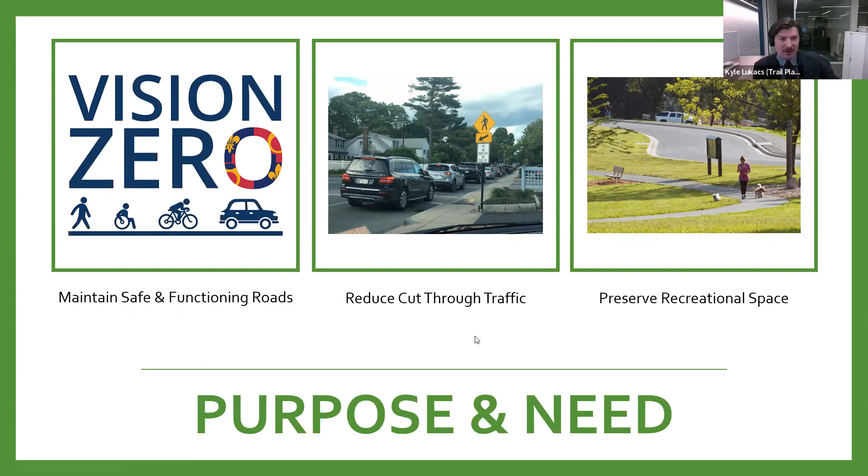Additionally, an added benefit of this is having essentially the Open Parkway space available 24/7 instead of just on Saturday and Sunday. So this slide here shows a cross-section of the pre-pilot conditions between Arlington Road and River Road.

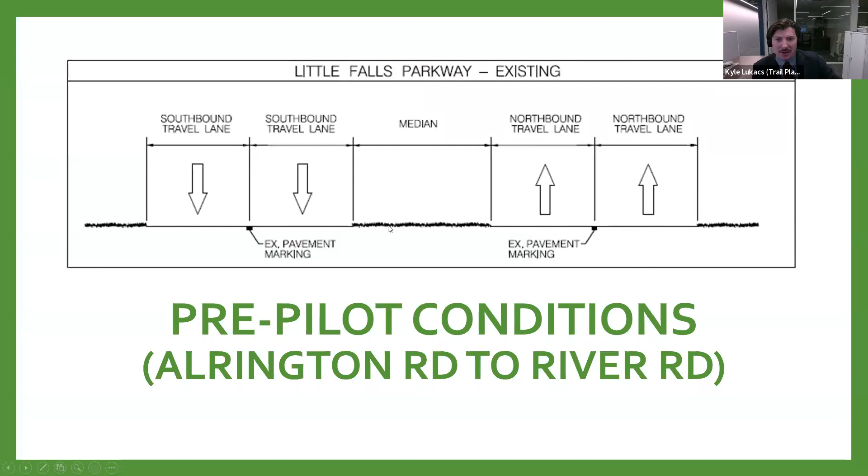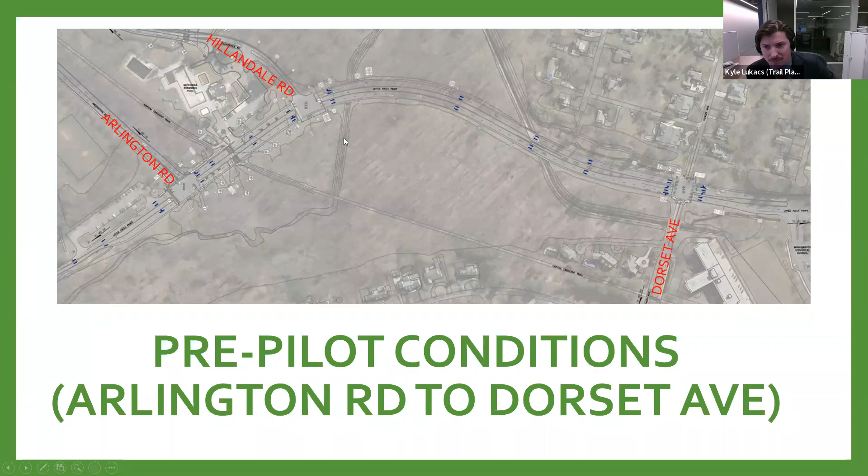Thanks, Kyle. Good evening, everyone. Thanks for joining us. Montgomery County is the first suburban county in the U.S. to adopt a Vision Zero action plan to reduce traffic fatalities and severe injuries.

Parks coordinates with DOT and SHA on trail safety and traffic calming projects throughout the county. It's an ongoing CIP program. Next slide, please, Kyle.

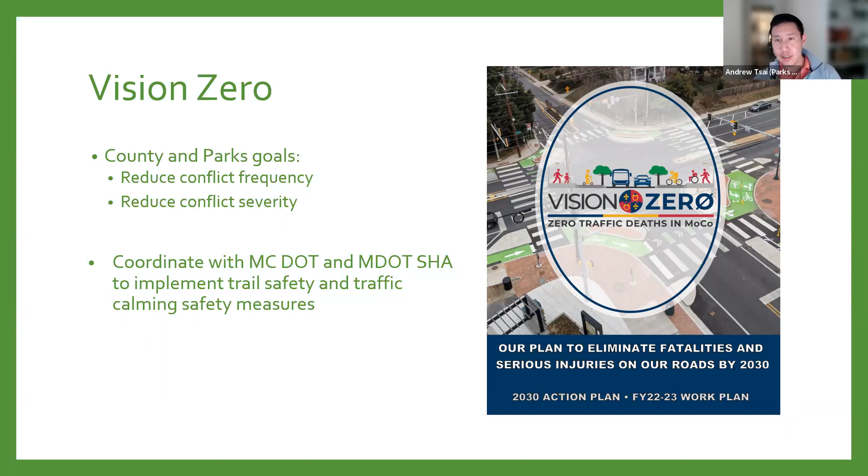As mentioned earlier, reducing vehicle speeds is the most effective way of reducing conflict frequency and severity. The graphic here on the right highlights that at a 20 mile per hour impact with a pedestrian, the pedestrian has a 95% chance of survival. That drops to 55% at 30 miles an hour, and at 40 miles an hour, not looking great for the pedestrian. Survival rate has dropped to 15%.

The driver's cone of vision as well as reaction time also increases at slower speeds. So at 20 and 15 miles an hour, it allows a driver the greatest reaction time and time to respond to shifting conditions in the roadway. Next slide, please.

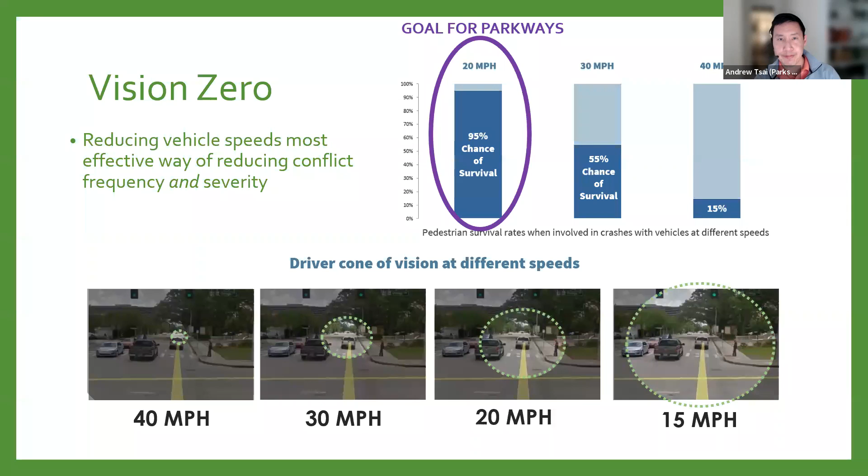These 2 pictures highlight the Capitol Crescent Trail crossing and Little Falls Parkway, which is in between Arlington Road and Hillandale Road. In 2017, Parks implemented Vision Zero based safety improvements at the crossing. And to point out what those improvements are, you can see the flexible posts that were used to shut down 1 lane in each direction.

As well as the installation of a raised crosswalk, which is sort of like a speed hump, a vertical deflection that forces cars to slow down as they approach the crossing. We also installed additional signage and other associated improvements.

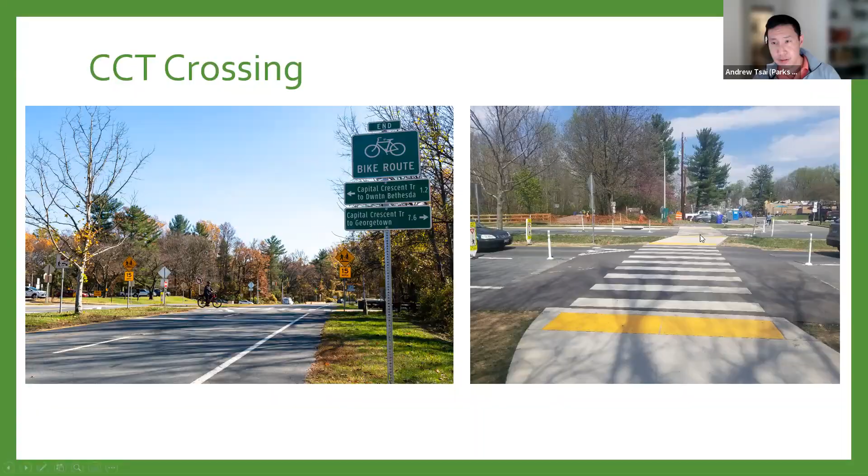It's also worth noting, as we're talking about the Capitol Crescent Trail crossing, that we do have plans to kick off a Capitol Crescent Trail facility plan looking at upgrades along the Capitol Crescent Trail. So this will involve its own separate outreach, as well as an existing conditions analysis, trail planning, trail design, and looking at amenities and trail connectivity as well. So we do have a process for Capitol Crescent Trail specific things moving forward.

Here's a timeline for Little Falls Parkway itself. So we launched this in April 2020 in response to the COVID-19 pandemic and kept this in place until December 2020, when we suspended it for the winter months, in part due to operational challenges. When we suspended it, we received a lot of pushback asking for us to reinstate the open parkways, which I'll touch on in a second.

But we reinstated it in March 2021 with a slightly smaller section. So originally it went from Massachusetts Avenue all the way up to Arlington Road, and we dropped the Massachusetts Ave to River Road section when we reinstated it.

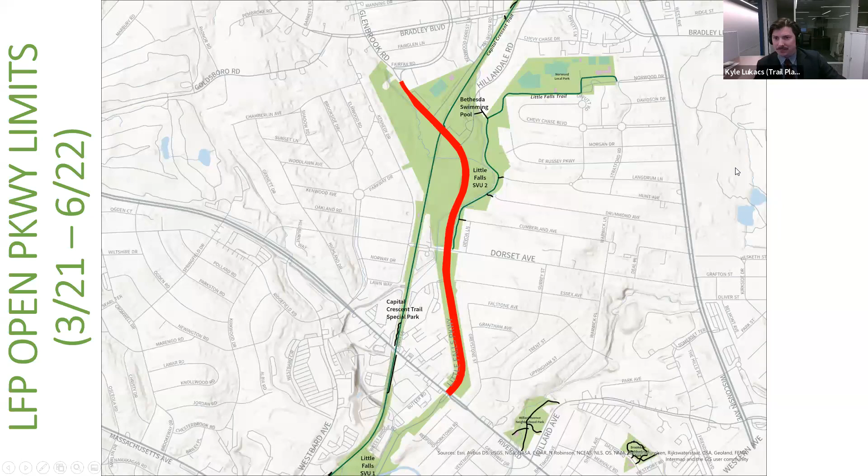One of the things we've done throughout the Open Parkways program is monitor the use. We have trail counters set up at several locations, two on each of the open parkways. We had one originally at Massachusetts Ave until that portion was dropped from the program, but we've had one at the Bethesda Pool location, two on Sligo Creek, and two on Beach Drive. Using these trail counters, we've counted over 300,000 users between April 2020 and June 2022, which works out to about 3,000 users per weekend.

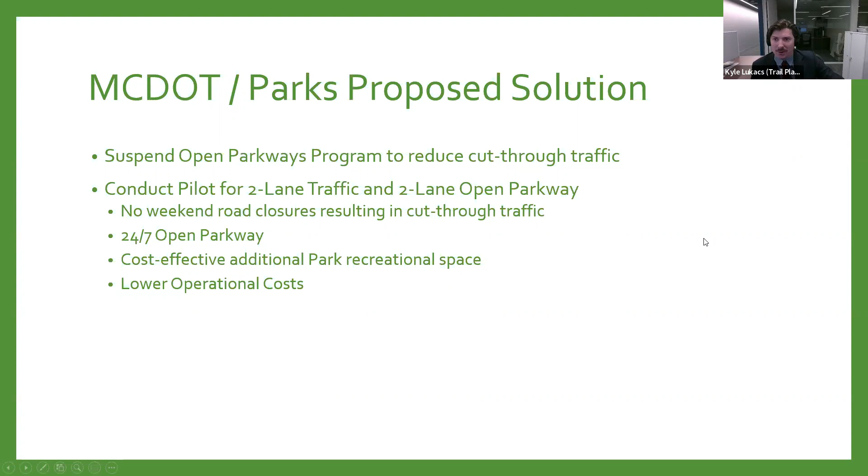Another thing to talk about: Little Falls Parkway between Mass Ave and River Road is 2 lanes. The entirety of Beach Drive as well as Sligo Creek Parkway are also 2-lane roads. So part of this is helping to create some consistency in the parkway experience across our parkways, and converting this from 4 lanes to 2 lanes helps create that consistency.

This slide highlights some of the public input and process that we've gone through to this point. I'm going to quickly cover this.

We suspended the Open Parkway program in winter of 2020. We heard strong opposition to suspending that program, with over 1,900 signatures on a petition, but we still heard concerns about neighborhood cut-through traffic. So we began our traffic data monitoring and collection, really looking at the impact on neighborhood streets. When the Open Parkways program was suspended in June and our pilot program was initiated, this was again due to the public input on the neighborhood cut-through traffic.

We've conducted several rounds of traffic counts and monitored the impacts of phase 1 and phase 2. We've also made adjustments to phase 1 and phase 2 based on the public feedback we've heard, down to the placement of a single flex post, as well as adding additional flex posts in some locations.

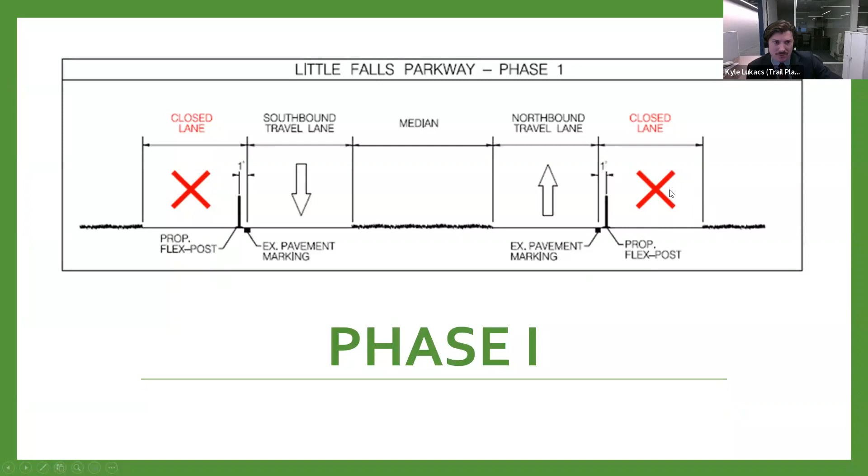So on each side of the roadway, we've dropped the outside lane and maintained the inner lane. Phase 2, we shifted all the traffic to the east side. So now the east side is two-way traffic with one lane in each direction, and the west side is open for bicycles and pedestrians and others to use 24/7. This was implemented in October 2020.

Here's again some cross sections. Where we have the grass median, we're removing the vehicle lanes, and we've got the southbound and northbound travel lane. At some of the intersections, or where we don't have the barrier, we've added some water-filled barriers to provide a little additional protection there.

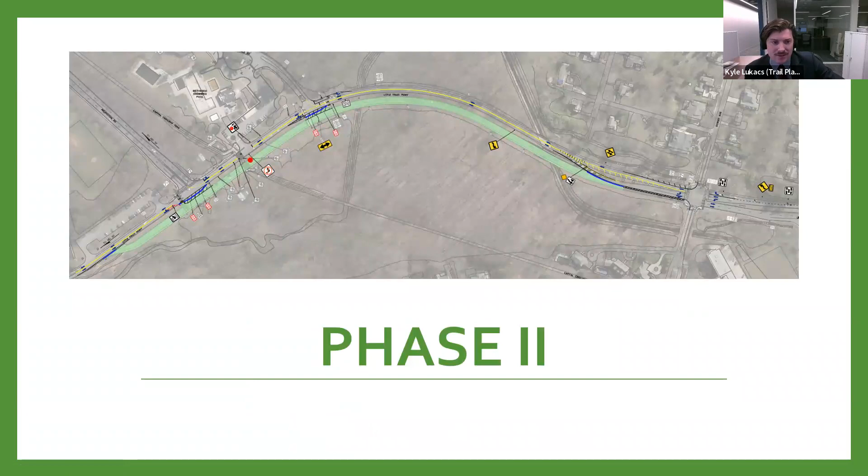Here's an aerial overview of phase 2, and I'll highlight a few things we've done with the design here. This in blue is our water-filled barriers, added to provide some protection for those walking and biking. We've moved the stop sign up to basically the edge of the roadway instead of where it originally was. We've also added some pavement in areas - this allowed us to add a right turn lane, to provide some additional space for those turning right onto Hillandale.

Where the two lanes diverge here, this is another example of where we've listened to public feedback. Originally this was installed without flex posts, and we heard some concerns, so we went out almost immediately and installed some flex posts here to make sure this roadway is as clear as possible and functions and works as best as it can. So we're really listening to the feedback we're receiving on the traffic configurations and making changes to ensure that it's working.

Now I'm going to pass it over to Andrew to talk about vehicular traffic counts. Thanks, Kyle. This presentation will be posted on the project website after this meeting so that everyone has an opportunity to go over this data on their own time as well.

It's a decent amount of information, and I'll be giving a summary of it.

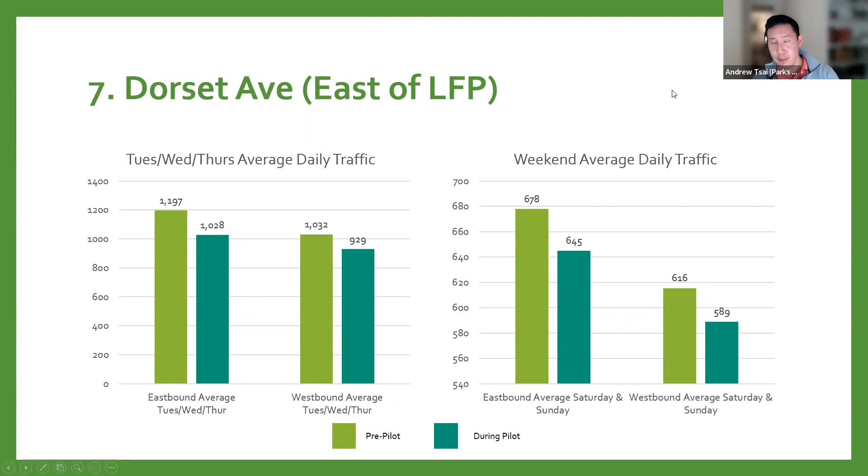Similar situation on the east side of Little Falls Parkway, where we also saw a decrease in traffic volumes.

Brookside Drive is also in the Kenwood community, and it saw a decrease in both weekday and a substantial decrease in weekend cut-through volumes.

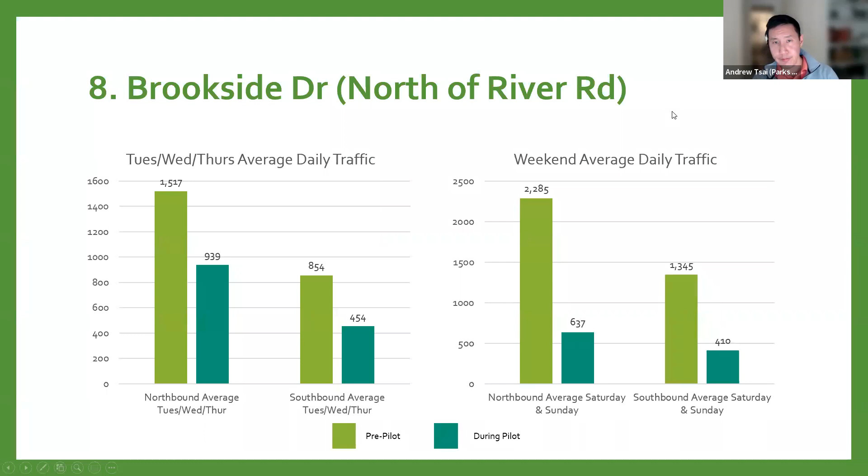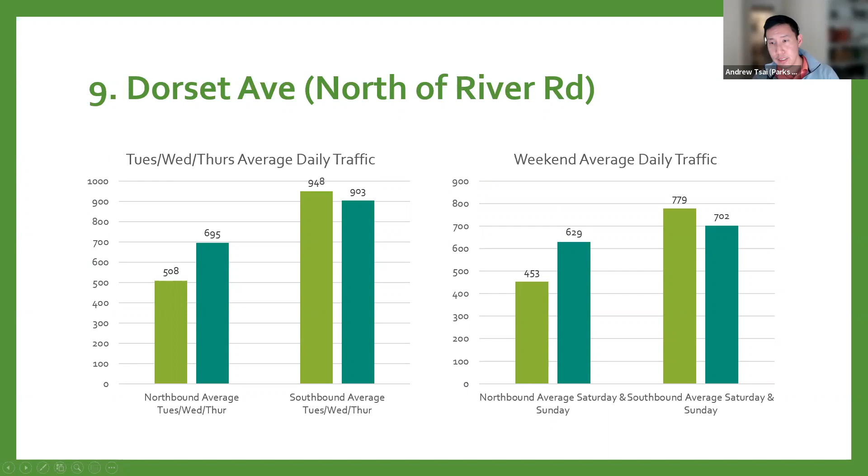Finally, Dorset Avenue closer to Maryland 190 River Road saw a slight decrease in southbound traffic, an increase in northbound weekday traffic, as well as weekend traffic, with a slight decrease in southbound traffic.

We also performed intersection turning movement counts at the 3 intersections along Little Falls Parkway - Arlington Road, Hillandale Road, and Dorset Avenue - to compare to counts we already had from 2018 and 2019. The takeaway was that the intersections are functional and operating within expected conditions.

We identified from these counts the peak hours along Little Falls Parkway, which were 7:45 to 8:45 in the morning, 4:45 to 5:45 in the afternoon. We also found that peak hour volumes have decreased in all directions from 2018 to now 2022, from peaks of 440 vehicles per hour in the morning northbound, 640 southbound, down to 350 and 580 respectively, and from 500 and 690 down to 450 and 560 in the afternoon.

We also conducted travel time runs. This wasn't conducted with computer modeling - it was done the old-fashioned way, a traffic engineer with a stopwatch in a car. So anyone can replicate this.

We did these travel time runs during the peak hours just described, from Fairfax Road all the way down to River Road. It consisted of driving up and down in both directions 5 times to get an average travel time, then using the average travel time with total distance traveled to determine average travel speed, which ranges from 16 to 18 miles per hour in the northbound and southbound directions. From the average travel speed, we used standard traffic guidance to assign an arterial level of service, like a report card from A to F. The grades assigned based on the highway capacity manual were 3 Bs and 1 C.

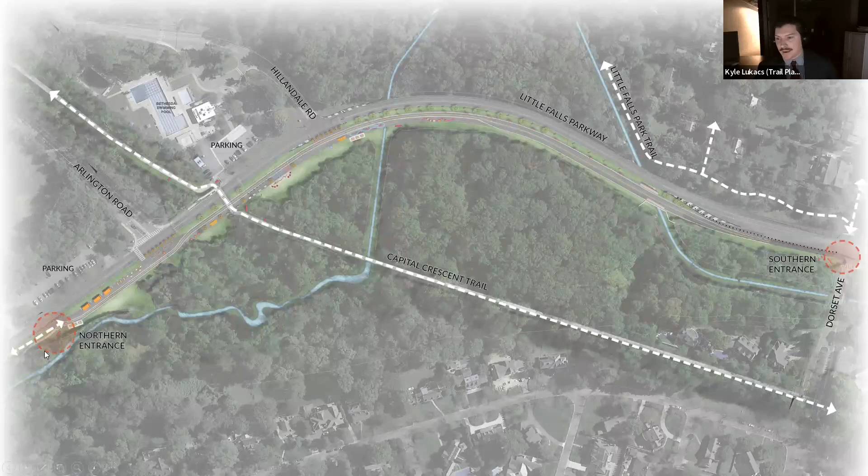Here's an end-to-end overview showing the full limits of the pilot park. And zooming in a little bit here, moving left to right, we're showing a few examples of the types of amenities that we envision could be activated for this pilot project, or pilot park.

We've got some room for food trucks as well as some seating. We've got some games such as cornhole, some space for mazes or chess and checkers, some ping pong tables, a variety of seating, some nature play areas, and some skate park features.

One of the other big things that I think would work really well here is this little area showing a traffic skills garden, an area where you can learn to ride your bike.

We've heard from a lot of people that the Capital Crescent Trail is already here, so why would you need additional recreational space? If anybody's been out on the Capital Crescent Trail, especially on weekends, you'd know it's extremely busy and some cyclists are moving pretty fast. So for me personally, I wouldn't take my daughter out there to teach her how to ride a bike on the Capital Crescent Trail.

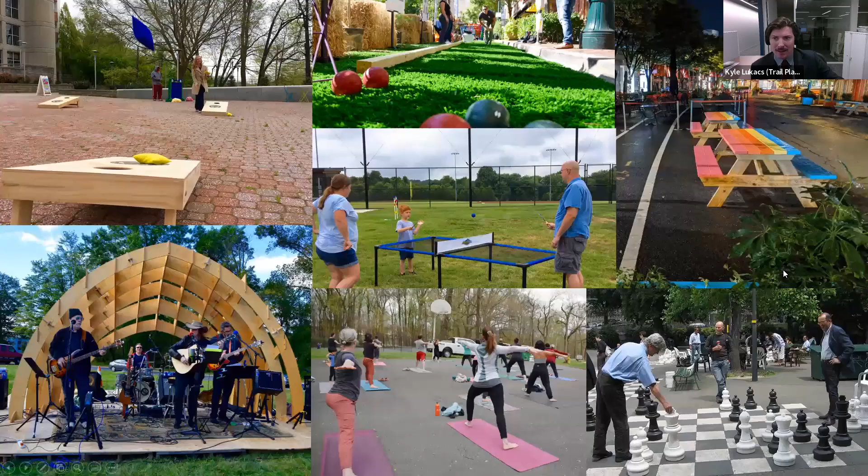But if I had some additional open space, recreational space, that might be better suited for doing things like that. Here are a few pictures from throughout the county of some previous parks activation projects we've done, things like music, cornhole, ping pong, bocce, and things like that.

Moving forward, if we are to implement this pilot park, we can make some additional safety improvements, such as fencing in the median or pavement removal at the intersection.

Another question we've heard a few times is where are people going to park to visit this? The first thing worth noting is the Capitol Crescent Trail is an extremely busy trail, a major connector for the communities in this area, so we think a lot of people will be able to walk and bike to this pilot park.

But we also have parking at the Bethesda pool, as well as just north of there, so we have some existing parking already in place. And if this becomes more than a pilot, that's something we can look at.

As far as the process, we are presenting the results of the traffic study right now. We will be going to the planning board to get their approval to maintain the current configuration. If that approval is received, we will work to activate the pilot park. Once that's activated, we'll go back to the public and initiate a process for looking at what a permanent park in that space might look like before moving on into design.

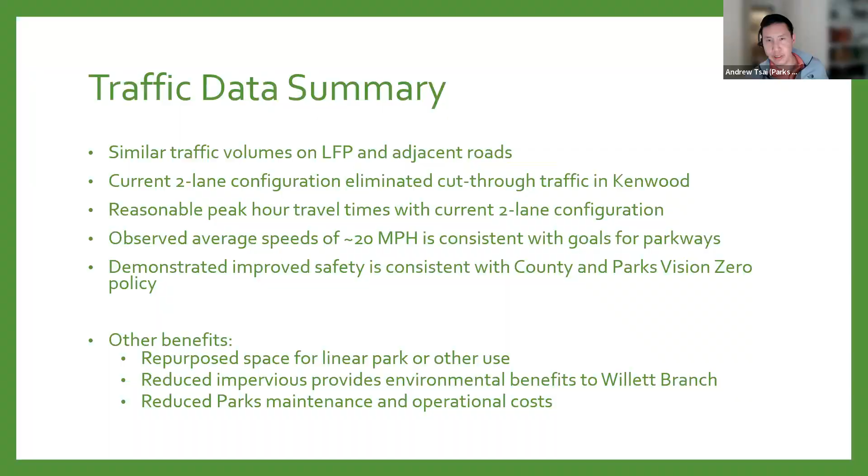Have you done any traffic counts on Kenwood and also on Goldsboro Road, which are 2 alternatives that drivers take? We have conducted counts in the Kenwood community, not on Goldsboro Road, but along 2 roads in the Kenwood residential community: Brookside as well as Kennedy. Brookside is closer to River Road and Kennedy is a little closer to Bradley Boulevard. In 2017, we also conducted some cut-through studies with vehicle cameras in the Kenwood area, but nothing specifically on Goldsboro Road. The counts for the 2 locations in the Kenwood community did show a decrease in both weekday traffic as well as a substantial decrease in weekend traffic.

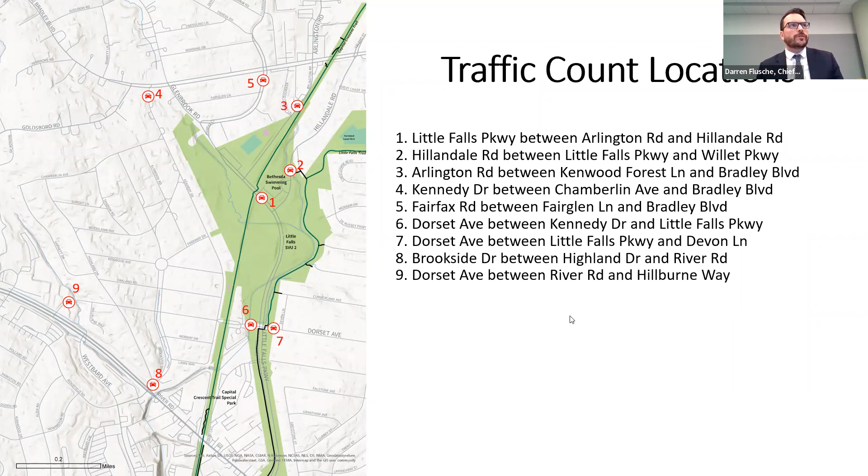Hi, thanks. I have to congratulate you on this excellent analysis and very thorough job. I'm a retired firefighter.

I was assigned to the Glen Echo Station the last 8 years of my career, serving rescues on the Capitol Crescent Trail and Little Falls Parkway and River and Mass. The over-design of Little Falls Parkway has always puzzled me, and it is a real safety hazard. So going to 2 lanes, I see as a great benefit here. You've shown me that the impacts to surrounding communities are limited or extremely limited. So I believe it's a win-win.

I'd like to see more forestation of the Little Falls Parkway corridor as a result of this work. That would be great. And the crossing of Little Falls, the Capitol Crescent Trail, Little Falls Parkway, just really needs to be kept at grade. I have attended to head trauma crashes where bicyclists have lost control going down the steep ramp on the bridge over River Road. This bridge, which causes a change in elevation for cyclists and walkers, is really a poor infrastructure solution. Thank you, Richard.

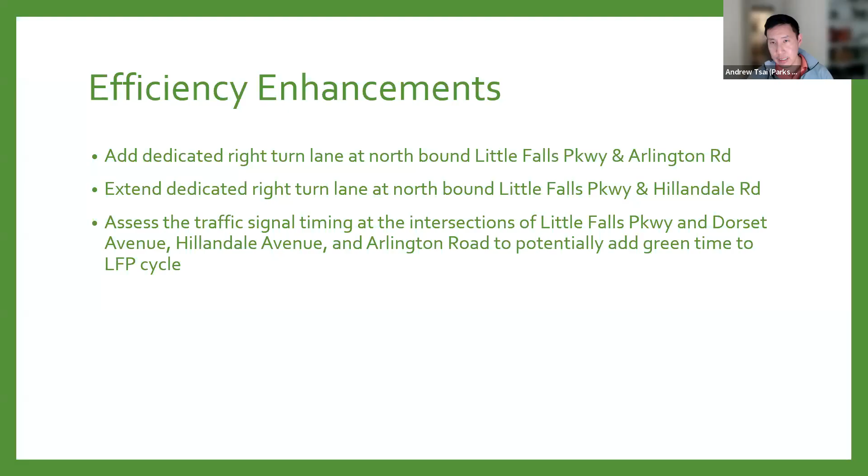Thanks, Andrew. You want to start with that and kick it to Brian? Yeah, sure, a lot of great points there. The counts we have along Little Falls Parkway, River Road, and Wisconsin have been done for years—Wisconsin and River since almost the turn of the century. We're seeing a long-term decrease in traffic pre-pandemic as well. So if federal workers go back to the office, we're not expecting that to result in a drastic change in the volumes. I'd like to invite Brian to speak about future modeling, future growth, potential implementation. That's certainly something we can do as well.

Thanks, Andrew. So let's leave this slide up. When we originally did the traffic model, we actually used 2016 traffic counts to be conservative, not expecting the continued decrease we're seeing. So we're pretty confident that future growth has been taken into account. As Andrew was saying, if this pilot program continues or gets accepted by the planning board, we'll be adding a right turn lane onto Arlington heading into downtown Bethesda, which would add capacity to the overall network.

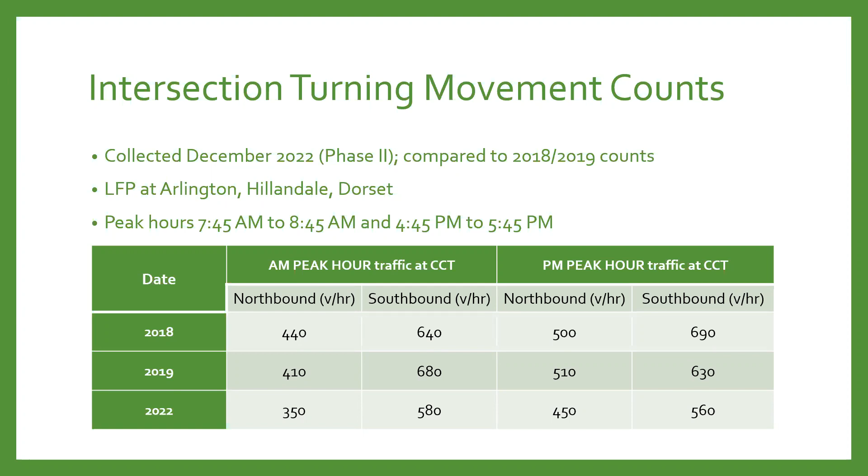And you were doing just fine until you eliminated the entire western part of the lanes at the pool going all the way down to Dorset Avenue. That's a development no one asked for, no one needed. All the data you're citing has nothing to do with that period of time since November. Moreover, driving on it, I've actually had to take emergency action to avoid a head-on collision from people who mistakenly go in the wrong lane on those two lanes.

What you've done in addition is cite the High Line as a model for what you're trying to do. The High Line in New York City, as you probably know, is an elevated freight line transformed into a public park, maintained by the Friends of the High Line, a nonprofit community organization. I really think the Parks Department should save the money, go back to the configuration that allowed people to pass down both sides with two lanes of traffic. You've done a good job with the safety crossing at the pool, we cross it every single day. And you need to remember, if it ain't broke, don't fix it.

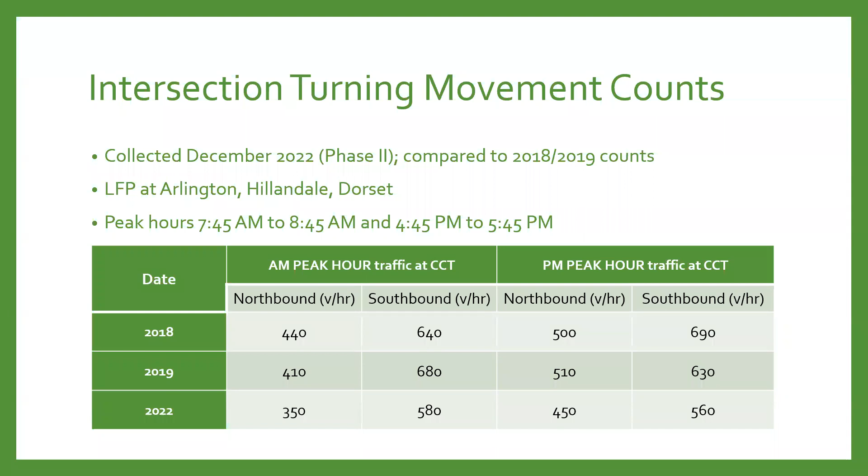Thank you for the comment. I think generally that comment speaks for itself, but there was a comment about when we did the counts, and I want to give Andrew and Brian a chance to address that piece.

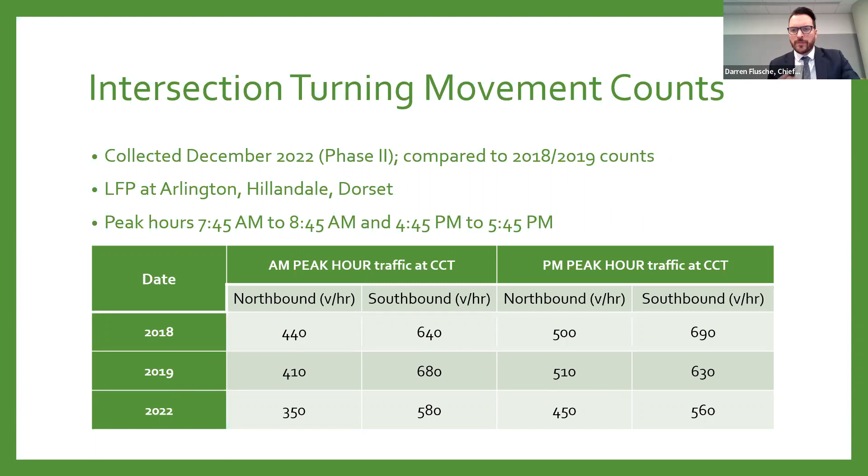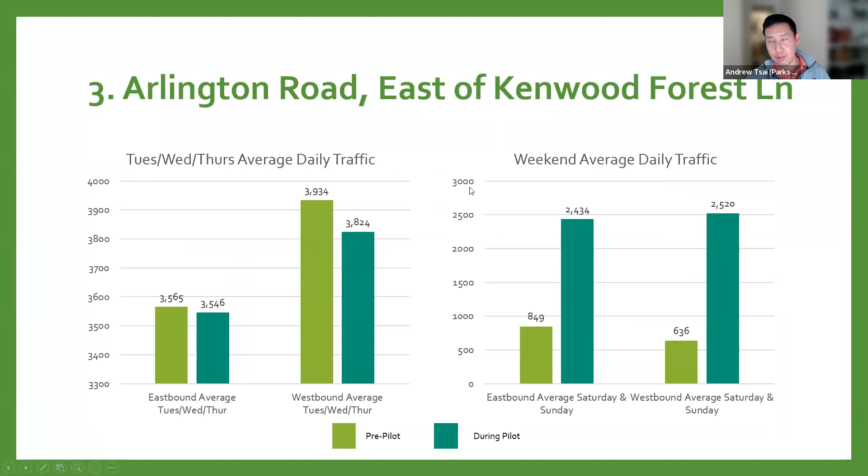I'll just add a comment on the bicycle and pedestrian count. We have trail counters out there that we've used to collect counts for bicyclists and pedestrians on the open parkways. We've also got trail counters on the Capitol Crescent Trail in a few different locations, and when you stack the data from the Capitol Crescent along with the open parkways data, it tends to peak and decline on the exact same day. So we're pretty confident in the data we've collected counting bicyclists and pedestrians.

I've seen that in the Q&A box a little bit, so I just wanted to provide some context to the bicycle and pedestrian data there.

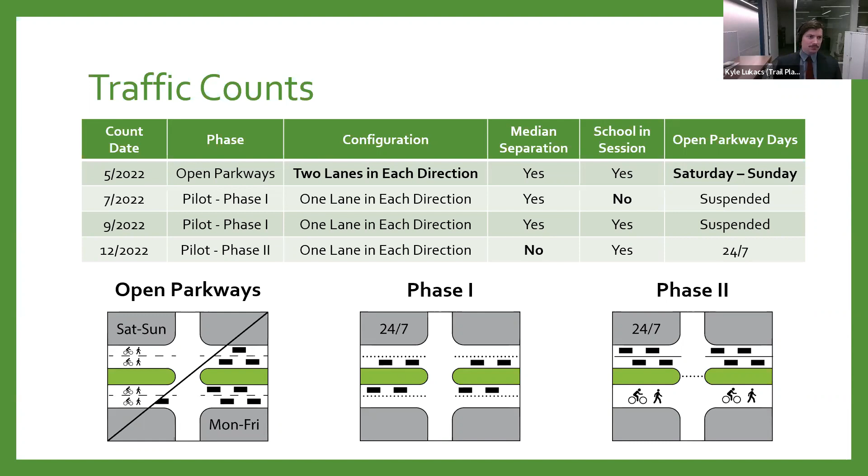Okay, I want to make sure I'm also introducing questions from the Q&A box. One was, if speed and safety is really the primary concern, why aren't there cameras or other speed enforcement measures? I think Lieutenant McAleskis touched on that a little bit, and I'll just state that as Kyle mentioned in the presentation, we have a holistic set of concerns, including safety, safe operation of the road, public recreation, and reducing traffic. So, Lieutenant McAleskis, I don't know if you want to say anything about other speed control methods.

Sure. For speed control, we do enforcement down there for speed. As far as cameras go, that would take coordination with Montgomery County government, and I'd have to look into it further to see what the parameters are that would make that area qualify for speed cameras with the county's program as it exists today. But right now, we can also deploy variable message signboards down there that can flash the speeds of cars to remind drivers of the speed limit. That does help — we've used it on Beach Drive and Sligo Creek Parkway, and it does help control the speed of drivers.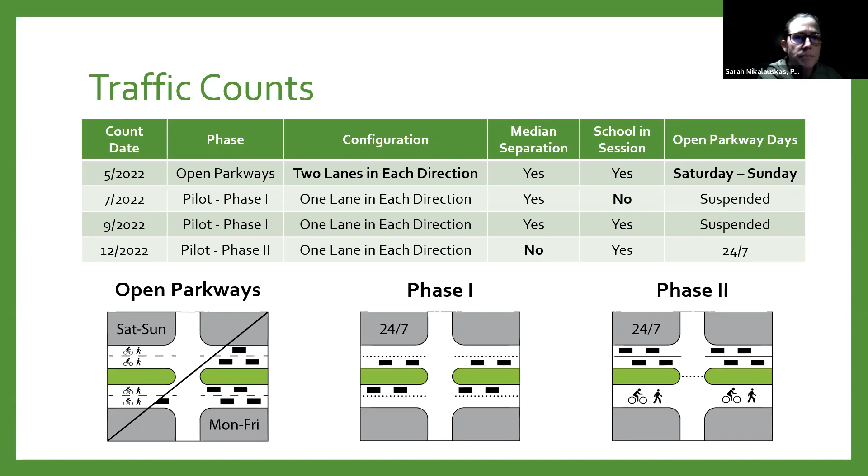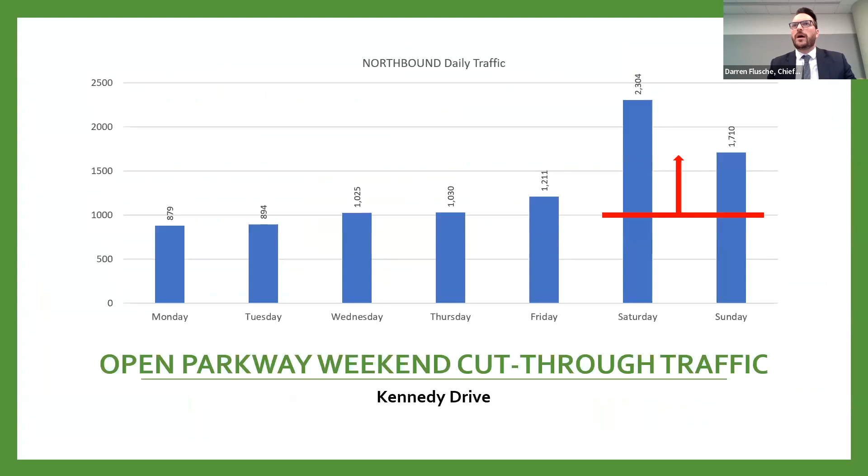Kyle, we have a question about the counts. I don't know if maybe on the slide we had 2.5 thousand people per day at Bethesda Pool. Someone says, what does that mean? Are you trying to tell us that 2.5 thousand people per day were actually walking along Little Falls Parkway? And we've gotten several other questions generally about how the counters work.

Going back to the slide on the user counts right near Bethesda Pool — these counts are showing just the days that the open parkway itself was actually open. So we're only counting Saturdays and Sundays from 9 a.m. till 4 or 6 p.m. on the weekends. Essentially what we have is a trail counter with an infrared beam, and every time that beam is broken, it counts as a user passing. So if you were to walk past it, the beam breaks, and that counts as one user.

Looking at when we first implemented the Open Parkways program and installed the counters, you can see this data point here was one single day where we counted just over 2,500. It's maybe a little easier to see when we're just looking at the 2022 data up till where the Open Parkways program was suspended. I looked up what this day in May was — it had like a half inch or quarter inch of rain and 40-mile-an-hour winds, so not super surprising that nobody's out there. But on sunnier, nicer days, we're seeing 6, 7, 8, 900 people counted here.

One point of clarification for both the bike-ped user counts as well as vehicular user counts: these are not unique individual counts. So if you were to drive your car on Little Falls into Bethesda and then drive back, you would be counted as a trip into Bethesda and a trip back from Bethesda. The same goes for these counts — this is basically the number of times somebody has walked past the counter.

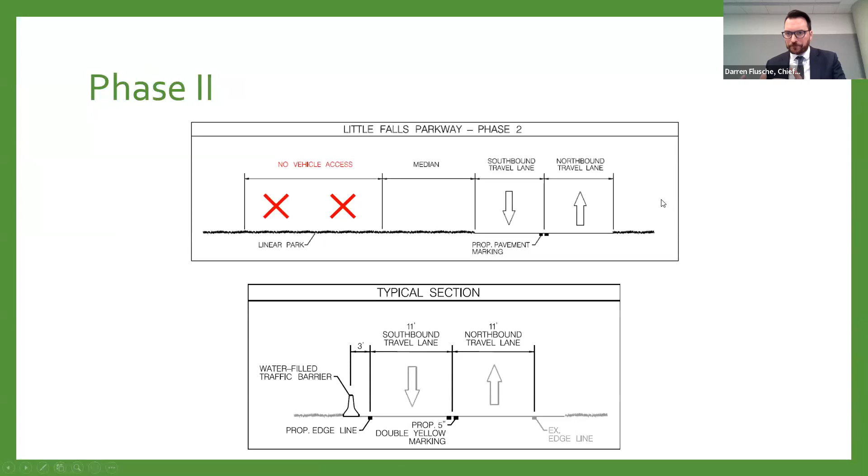So yes, in the event we get the green light from the planning board to move forward with the project, we would still very much like to do the pilot program. It will require a lot of ramp-up really fast, and Kyle will be very busy trying to deploy and arrange for that pilot condition. The question we're going to ask the planning board is: do you agree that the road is functioning with two lanes such that it makes sense to even think about a park here? That's really the question we're posing, and based on their answer, we will move forward with the test park, the pilot park, and then proceed with a permanent park. That's the decision of the planning board.

So really great question—it would delay the pilot park, is the answer. This process of going to the planning board first is going to delay that. So I hope that answers your question.

We've got a question from the Q&A box that's a combination of questions, so I'm going to read it all. What is the budget for the future plans for games, bikes, food trucks, and pedestrians? Why is the Parks Department spending this amount to create parkland when there are parks already in the vicinity? Aren't there other communities who need the parkland more? Did anyone provide a cost-benefit analysis of the pilot or the project? And several questions are asking about the budget for this project and what projects it might displace.

Okay, great question. Kyle, do you have some of the numbers you can speak to, or Andrew—I can't remember. I know somebody had prepared for this question.

Kyle, I cannot hear you. Can you hear me now? Yes. Okay, I don't think I have those numbers handy, but I will look for them right now.

This is Andy Frank. Question: what was the cost of the pilot program on Little Falls Parkway? The phase 1 cost was approximately $40,000, and the phase 2 cost was approximately $90,000.

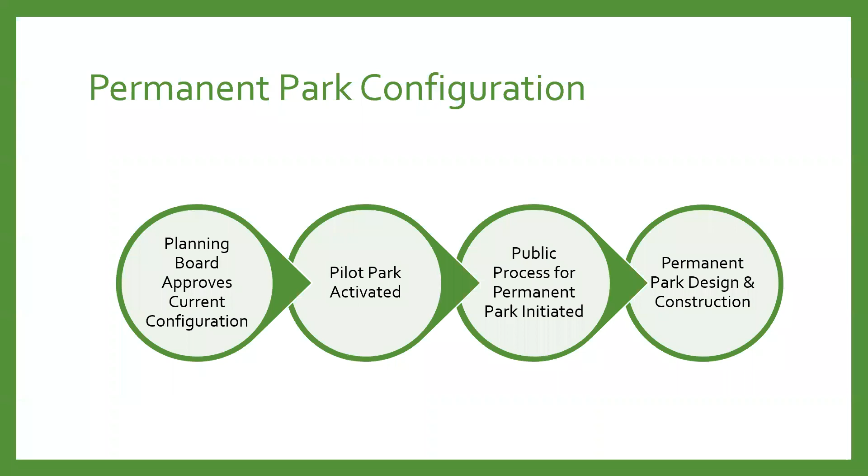I wanted to know — you've had a lot of things on percentages of homes, like how many people signed a petition, but you never give account of how many people could have signed those petitions. So what does that number mean? The other thing I've seen on your Parkway is that bike lanes just end or disappear, which I find rather dangerous. And now the introduction of, let's say, ping pong tables where people are biking or learning to bike makes it even more dangerous. It might be nice to have the recreation capability, but I find that having all of this game activity can be distracting to bikers, and definitely distracting to drivers, on the other side of safety. That is one of my big concerns.

I'd also love to see one of these in action, but I don't know that one can. Thank you. Yeah, thanks for the comment.

One of the advantages of doing a pilot is we get to test things out and see. I think the way that block of Little Falls Parkway is configured, we would plan to concentrate some activities more close towards the crossing, providing at least a 10-foot pathway through, and then open up the area south of that so folks could learn to ride or rollerblade, which is challenging to do on the Capital Crescent Trail. So your point about potential user conflicts in the pilot park is well taken, and something we'll certainly consider in the design. In terms of distracting drivers, I think that's something we'd have to see — I don't anticipate it being a challenge, but again, that's the beauty of being able to test these things.

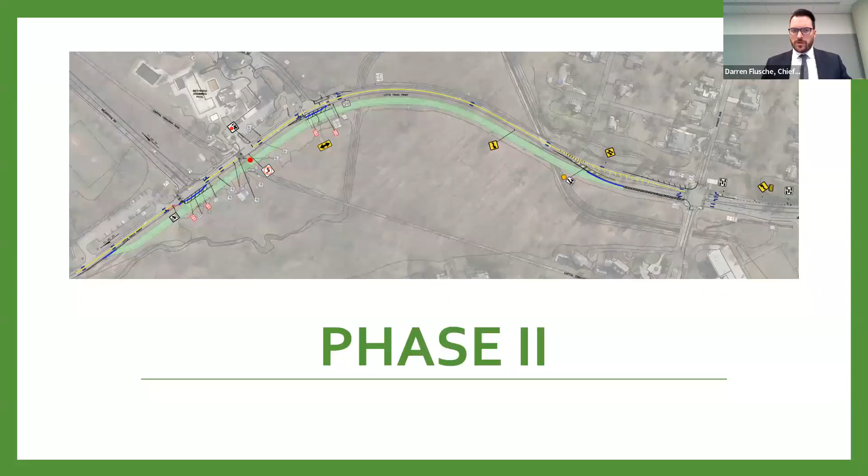What that would do is two things: put the park users, pedestrians and bicyclists closer to moving traffic, and split up the public space. It would mean we couldn't have more of a park experience, it would be two linear travelways, which isn't necessarily without value, but it's a different vision. That's our thought process there.

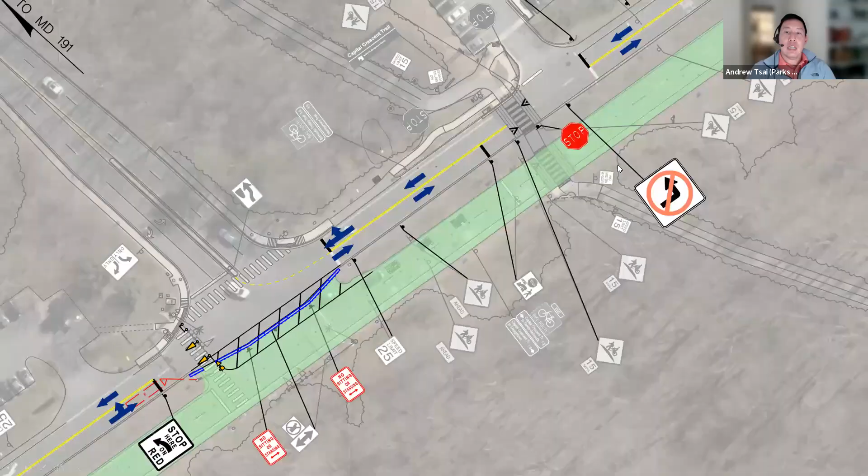Go ahead, Andrew. Yeah, absolutely. In 2017, 2018, when we did the cut-through study in Kenwood using cameras, we were able to identify the average travel speeds of cars traveling through there. I'll defer to Brian as to what that speed was. Off the top of my head, I believe it was a few miles per hour over 25, maybe 25 to 27 miles per hour.

Cut-through volumes in the Kenwood community since implementation of phase 2 pilot conditions have dropped significantly, both weekday and weekend volumes. But we do not have speed study data for that traffic, we just have counts.

Thanks for that. The test of this pilot was whether it would reduce cut-through traffic on Kennedy Drive, and we're happy to report that it has.

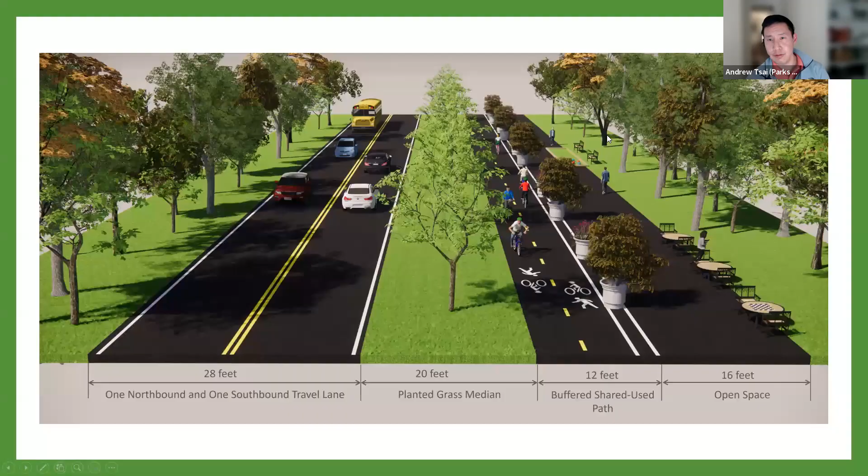We haven't studied roundabouts in detail, but generally roundabouts have some disadvantages—their impervious area and overall footprint and impacts are substantially larger than a typical intersection. Certainly roundabouts have their uses, and for roadways where traffic volumes are suitable they could be a good idea. But in the facility plan in 2018-2019, we did preliminarily assess some roundabouts along Little Falls Parkway, and found the impact overall to the environment and the stream buffers were just too substantial to really justify their benefit.

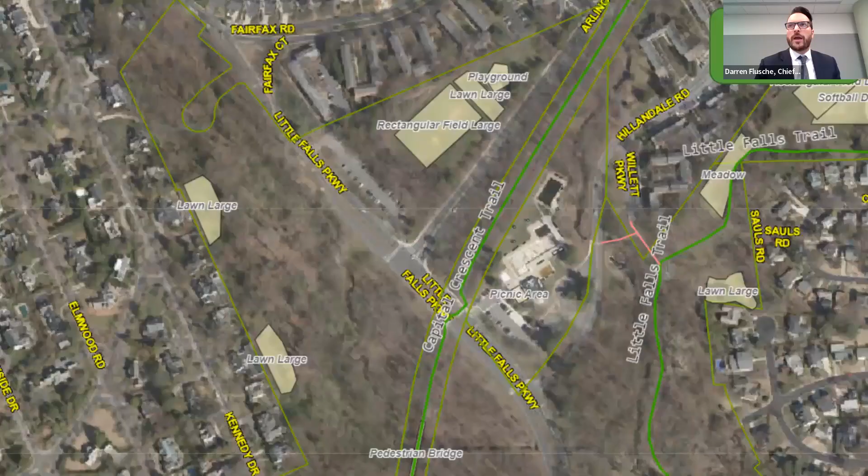Where is that being located? Sorry, I'm trying to catch up on some of the Q&A box questions. There are several questions about whether or not Little Falls Parkway should be compared to Sligo Creek Parkway and Beach Drive, and how they compare. I don't know if somebody... yeah, Andrew, you want to take a shot?

Yeah sure, so we make that comparison because Sligo Creek Parkway and Beach Drive are both two-lane park roads built to provide access to stream valley areas as well as recreational driving opportunities. They're both in populated areas - Sligo Creek Parkway is in Silver Spring and Takoma Park, Beach Drive is in Kensington - and they both see average daily traffic volumes that are consistent and roughly on par with Little Falls Parkway's current average daily traffic, so we think it's a valid comparison. Also, in addition to comparing to Sligo and Beach, we have a two-lane section of Little Falls Parkway south of River Road, which provides another good comparison. Yeah, it's a great point as well.

So we've had a number of questions following up about the roadway being able to handle future traffic increases from development in Westbard and Bethesda, and from potentially more workers returning to the office. So Andrew and Brian, would you guys be able to speak again to the projections and confidence there?

Yeah, so that's a point we've discussed during our presentation - long-term traffic volumes have been trending down prior to the pandemic and prior to federal telework being a larger thing than it is now. River Road at Wisconsin Avenue, starting in 2001, 2003 to 2018-2019, down 20%. Little Falls Parkway, 2016 to 2022, down 35%. A typical two-lane road with a 25 mile per hour speed limit and turn pockets can usually accommodate 20,000 vehicles per day, and right now Little Falls Parkway is below 11,000, so there is extra capacity there should there be future growth in traffic in the area.

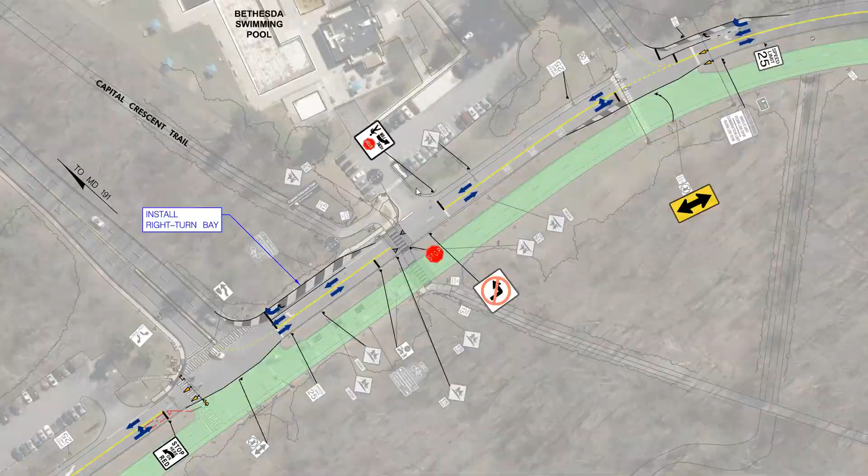So the question that we're putting before the planning board is the completeness of the traffic analysis that shows the 2 lanes are functional, and to ask them for their guidance on converting the area from Arlington to Dorset, or north of Dorset, to the 2-lane configuration in the opposing lanes. And then, of course, that would go through a process with the National Capital Planning Commission. It is not asking them about a permanent linear park.

We would expect them to weigh in on the temporary activation that some people mentioned earlier today, which was discussed with some communities. But a future permanent linear park or other repurposing of the closed lanes would be the subject of a future facility plan, with a separate process, community input, and planning board decisions. Right now, we are talking with them about the sufficiency of the traffic analysis that shows the functionality of the 2-lane road.

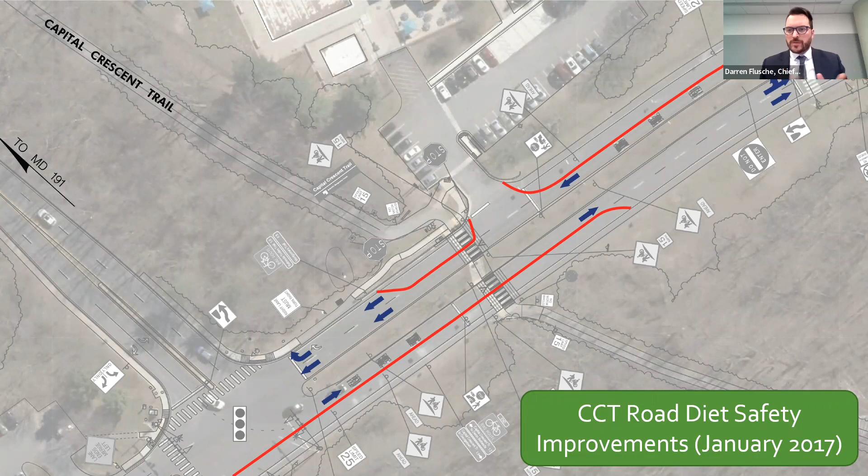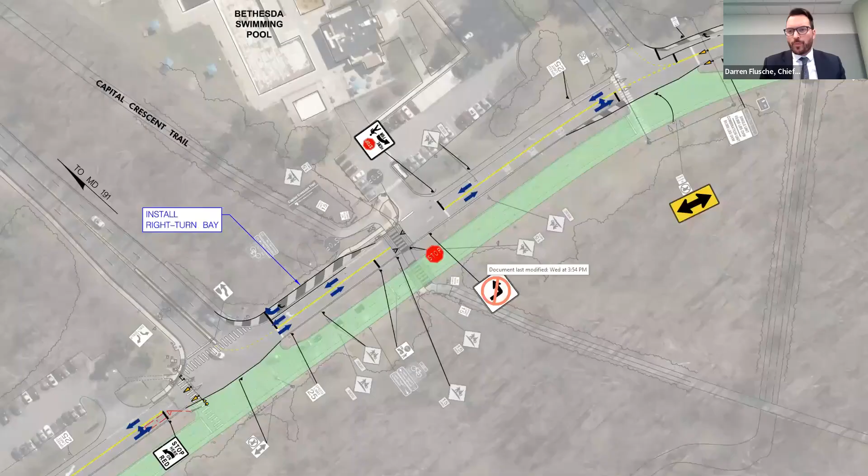Yeah, so this is a good point to end on, since we're just at 9 o'clock. I'll summarize by saying the planning board will direct us to maintain the 2-lane configuration or go back to 4 in this March date. Then there'll be plenty of opportunities to envision with the community what worked, what didn't work about the pilot, what's—chess, no chess. We can have lots of conversations about what the best use of space will be moving forward.

And Darren, to clarify, the area between Hillandale and Arlington would not be open to the discussion of going back to 4 lanes. It's been clearly demonstrated that it was unsafe in the 4-lane conditions, and the safety has dramatically been demonstrated to be improved—the safety improvements are not in question in that area. We would not be proposing to them to reconsider opening that to 4 lanes. It would simply not be a safe condition.